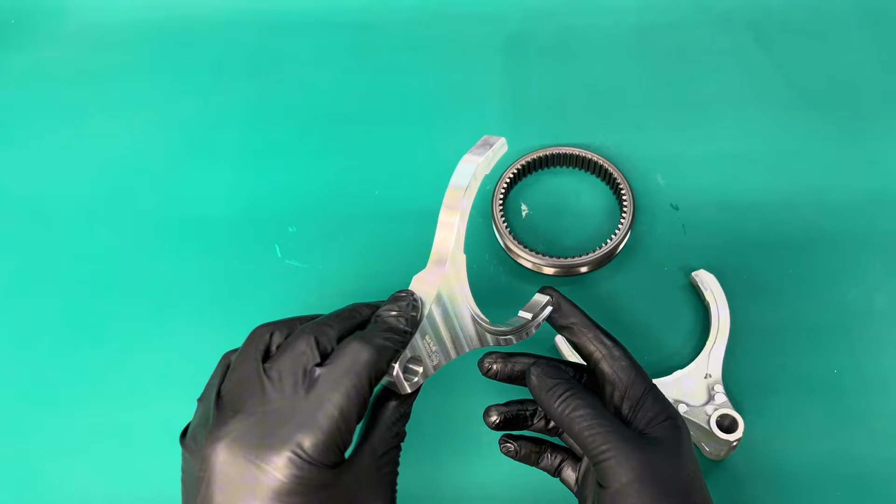This is made out of 7075 T6 aluminum, which is the high strength end of the aluminum spectrum. It delivers forged-like resilience in a machinable billet form, outperforming cast aluminums in every meaningful category, from strength, fatigue life, dimensional accuracy, and long-term reliability under thermal cycling. So it's just absolutely perfect for our automotive application that requires these forks and that needs a little bit of help as the platform is aging.

So obviously it fits everything absolutely perfectly. It's set up super nice. Then it has our design here where the OEM, so you can see from the smearing here, only makes contact in 3 points, and it's starting to smear pretty bad through here. Ours, we made it a little bigger here, so it's like OEM, but the sleeve makes contact all the way around the face of the fork.

So this gives you a lot more strength, stability, and life out of the fork because you're distributing the load across the entire face, not just at 3 small points. And even this point here we made bigger than OEM. So there you go. Very nice piece.

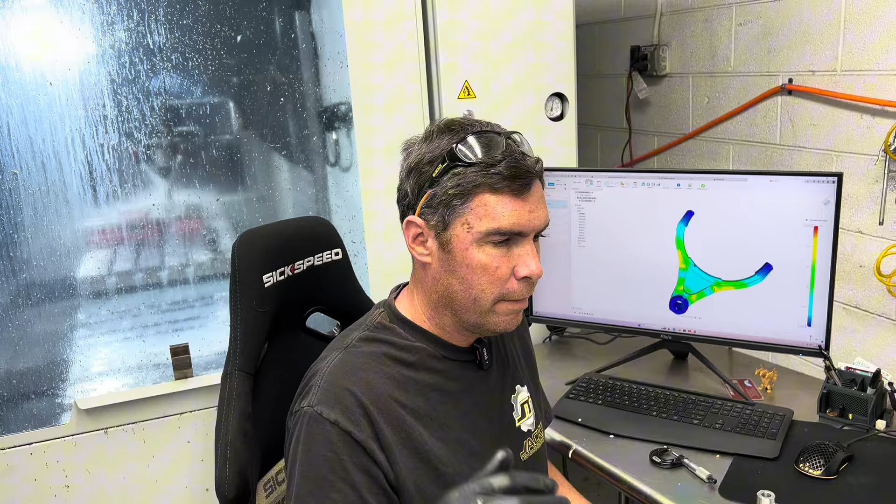So what we're doing here is we have a simulator. So we calculated, for somebody making a ton of power, they're at the track, launch the car in first, you go over to second, you're putting everything you got into that 1-2 shift as hard as you can, but you missed it. You let go of the clutch too early, or the synchro is grinding or something, where you're putting everything you can into that shift and it's just not going in, it's blocked. That's about 2,000 Newton meters of pressure between the sleeve and the fork here when that happens.

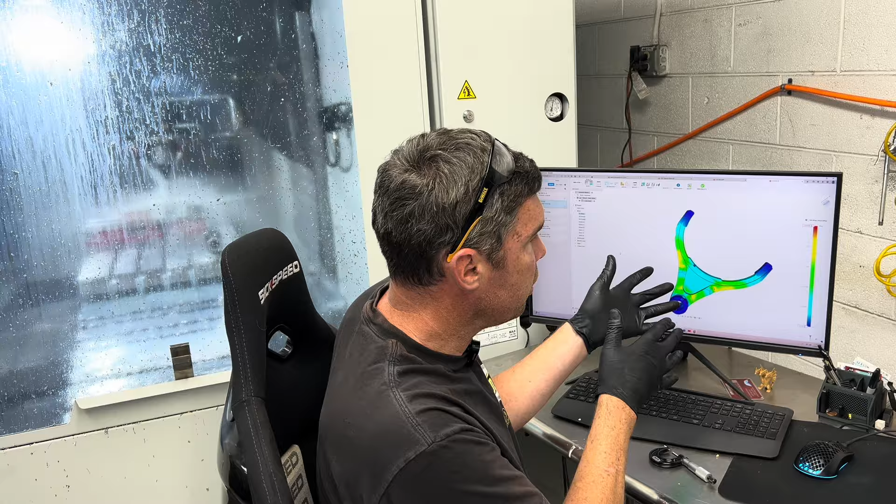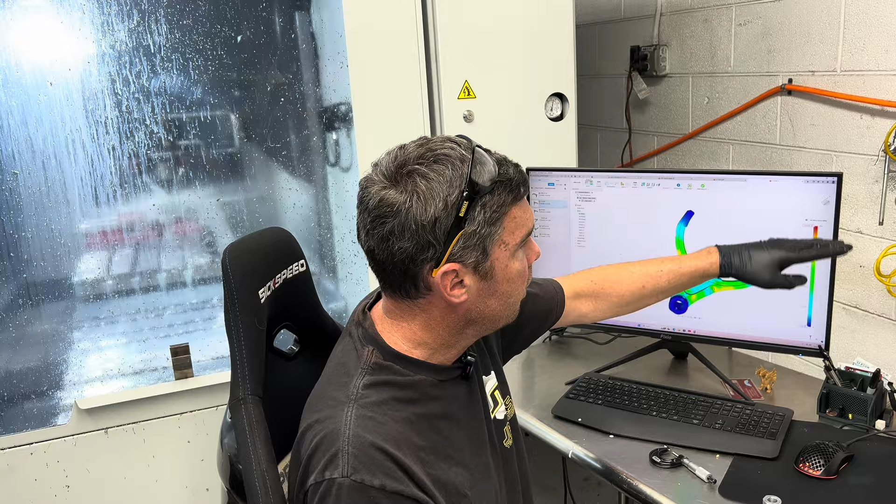So in the simulator, we have it at 2,000 Newton meters of force, and we're checking things like stress risers, what kind of stress are we looking at in the fork? We can see a little red dot here. That's a stress riser. Maybe the next batch that we machine, we'll do like a little fillet there. But again, this is worst case scenario. So a red spot really doesn't matter too much. The rest of it though looks pretty happy. We're only at the mid-range of what the stresses look like on this fork. It's actually not too bad.

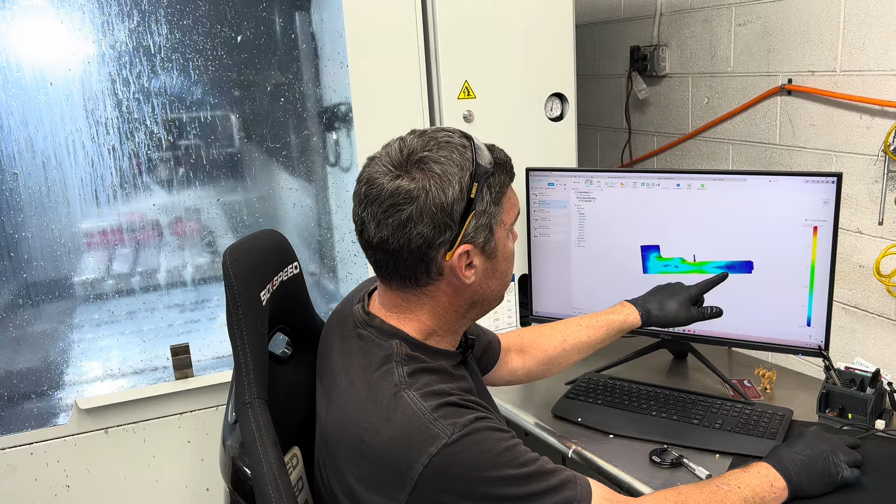And then when we go over here, I try to look at deflection, because we're going to have deflection here on that worst case scenario shift. Let's see what the deflection looks like. So we come up to deflection, we could see just a little bit. So right from the center out, we have a little bit of deflection, which makes sense on any fork. They all do that. We'll exaggerate it here. That's what it looks like. But yeah, that's about it.

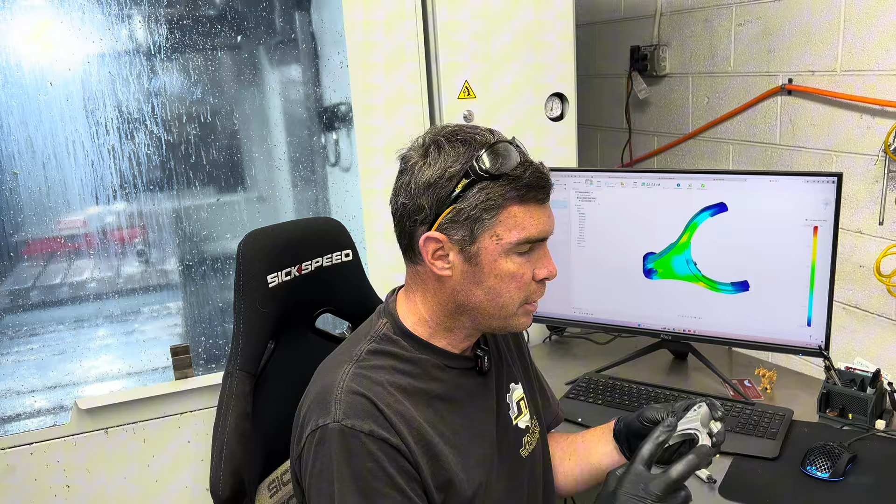So, with stuff like this, we want to make it efficiently, but we also want it to be as high quality as we can make the part and to be as strong as possible. So like the top here, from what we calculated with all this, we don't need anything special going on up here. We can leave this smooth so the machine only has to make one pass through here. It doesn't need to spend a lot of time, so it saves on machining costs. It saves on the cost of making the fork.

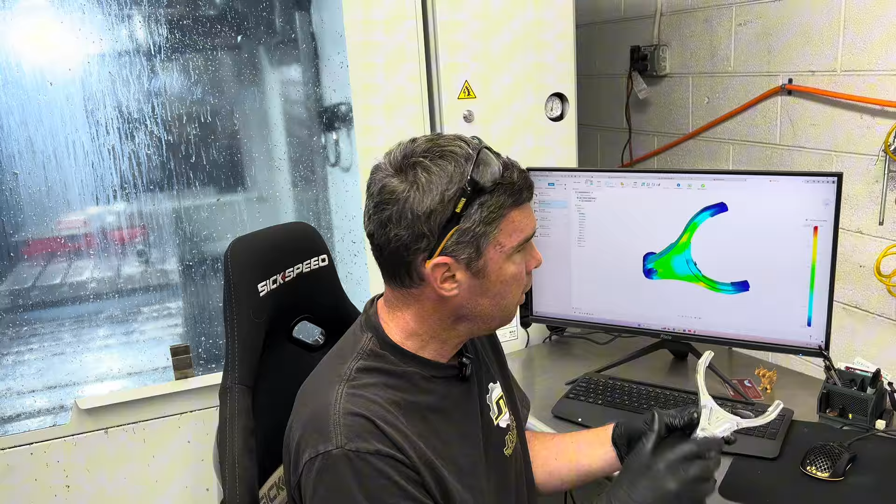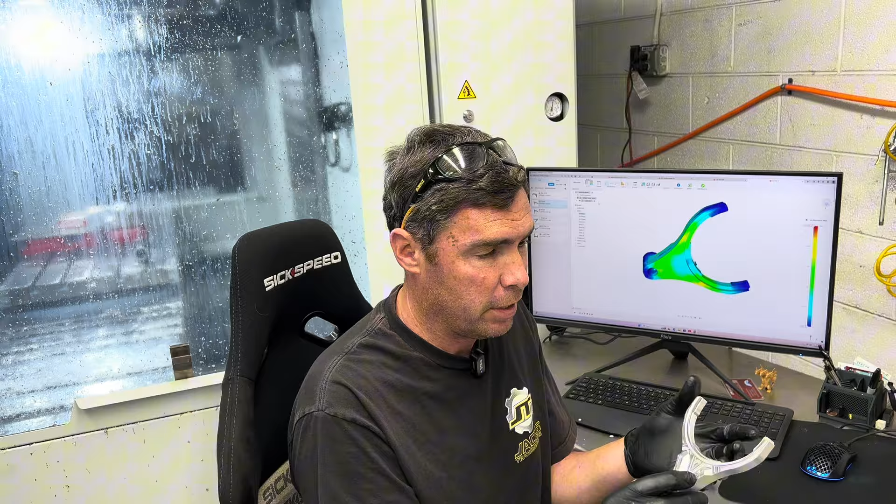And we look at the back side here, again, like we saw with the deflection, where it moves back and forth this way. We added a little bit of reinforcement here, to give it a little bit more strength in that area, so we reduce the deflection. But again, it's a simple pass with the tool to go across there to give it a little bit more strength, and it really didn't need it to begin with, but just making it the best we can. So there you go. That's what goes into this stuff.

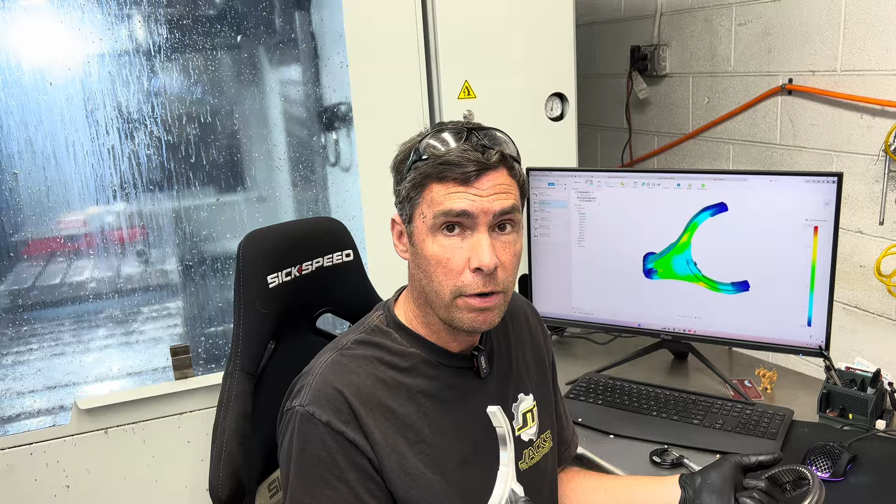We did some simulations on heat as well. And no matter what we would plug into the simulator in a transmission, especially your EVO 4 through 8, 4 through 9, 5-speed trans, it's just never going to generate enough heat to bother this 7075 aluminum. It does not care. It doesn't affect it in any way. It's pretty crazy. So that's about it. So that's what it takes to do these.

And obviously we test them in a few units. We give some customers some deals. They give us some feedback and stuff on them. And these have been amazing.

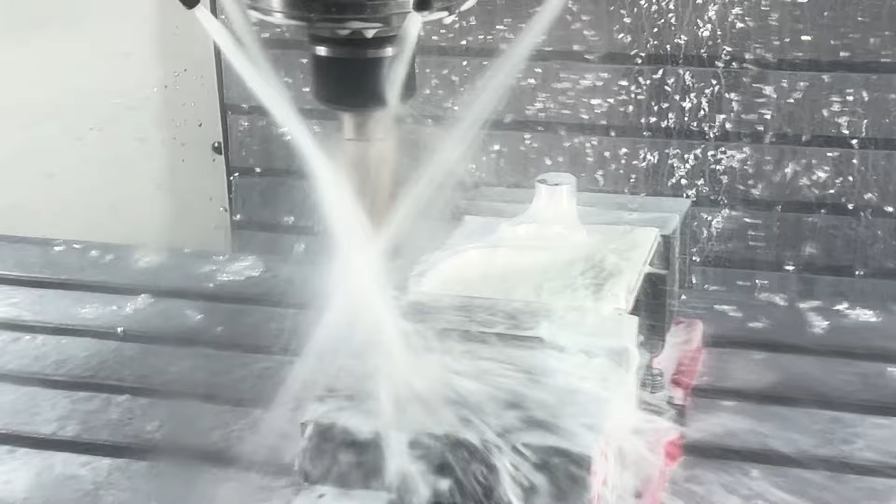There you go. Let's watch a machine make one real quick and see what it looks like. EVO 8 9, 1-2 fork.